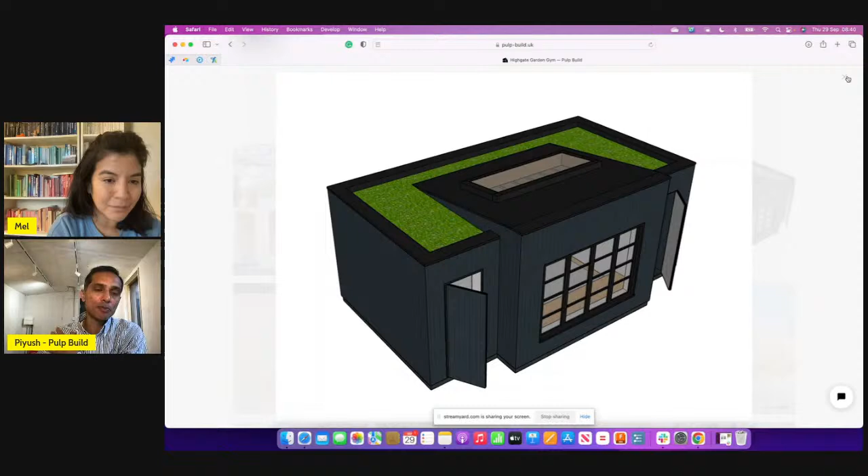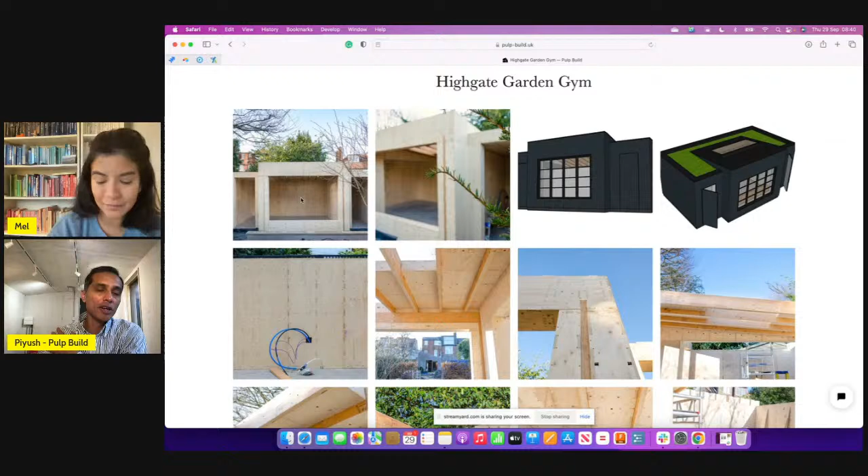This one is not a WikiHouse construction, but it is pretty much all digitally fabricated chassis, very similar to what WikiHouse components look like, with the Skylark system. It's slightly different because I believe Skylark was still in development during this process, so we used a bit of hybrid technology where the main components are all digitally fabricated out of 18mm, 3/4 inch plywood cut on a CNC router.

They cut like pieces of a jigsaw and come together as a block - so those are all the wall blocks you can see, and then we have roof blocks as well. The main load carrier in this situation is LVL, laminated veneer lumber - it's a bit like 2x10 timber, but it's engineered timber of the same size.

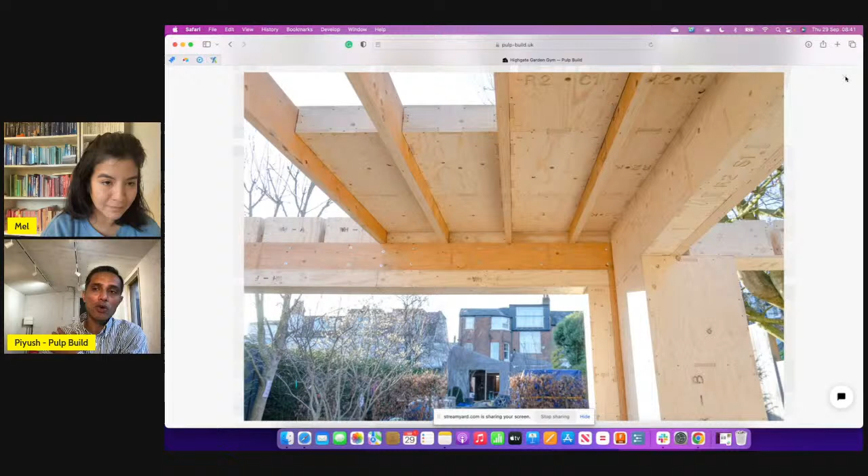So you can see we have LVL for the lintel, and then LVL as a post, and we also have roof rafters as LVL. Our cassette digitally fabricated system slots perfectly into the gaps - even the LVLs are placed and slot into prefabricated slots in the chassis. So there are no on-site measurements or cutting needed with this timber; they're pretty much pre-cut from the manufacturer and slot into place.

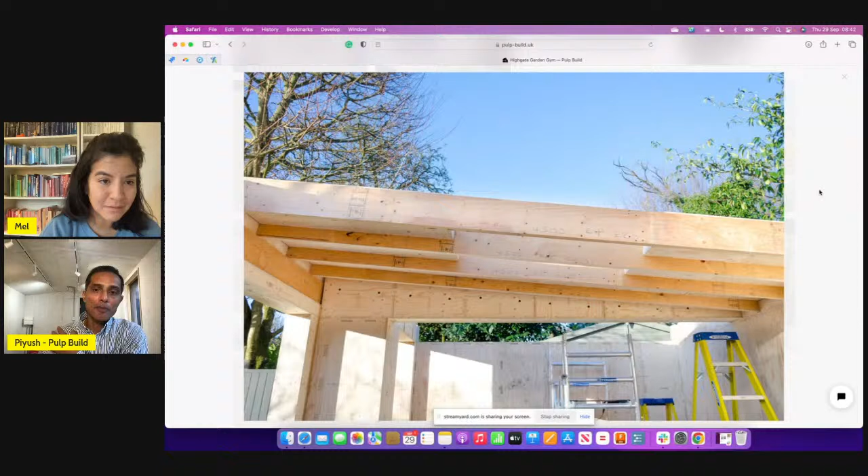So there you can see how we've got the mono roof and slope roof meet - so we can come up with any bespoke shapes and sizes.

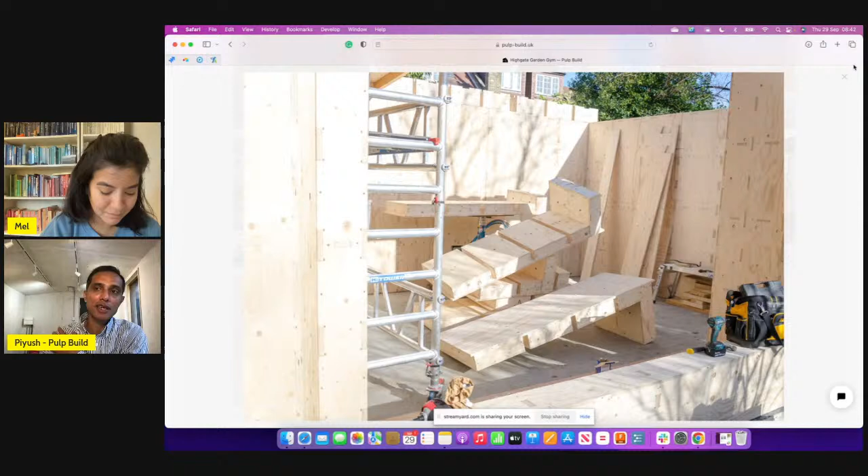So if I give you a quick example of the cassette system, you can see they are pre-notched to slots between the roof rafters, as well as the end box, which are quite different shapes and sizes just to meet different interior roof lines.

You can see here the system where we have a non-exposed roof line on the left and that exposed roof line on the right. So we can do quite architecturally pleasing construction with the similar system.

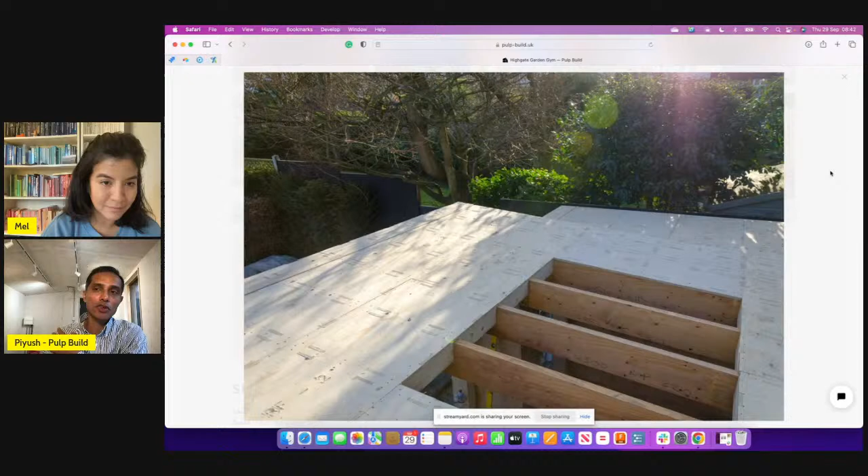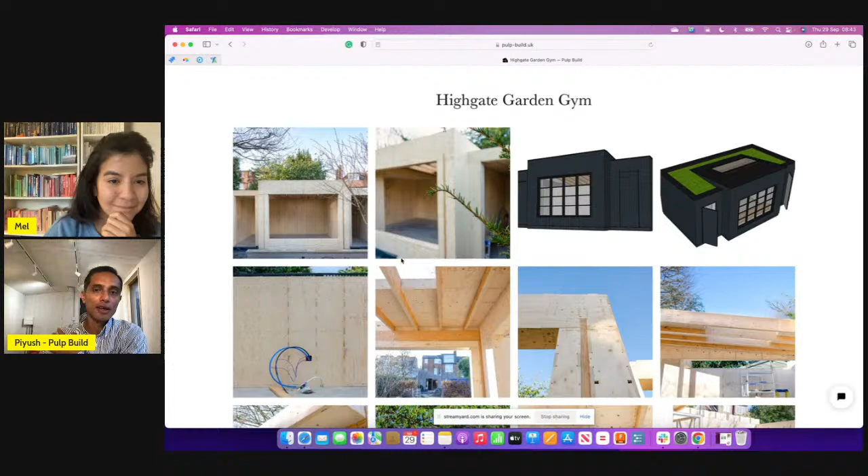This project we finished in about 5 days, a week's time from arriving material on site to weather wrap and handing it over to the main contractor, which then finishes the whole project. We haven't got final pictures yet, but I believe the project is finished with the architect.

The next project we did is our full turnkey project. This uses a combination of two WikiHouse structural technologies. Before I come to the final picture, let me quickly go down and walk through this fully bespoke system.

Normally in digital fabrication you tend to copy your one module many times, taking advantage of the WikiHouse or digitally fabricated system. However, the Garden Studio design, working with us as a digital manufacturer, the architect was quite keen for the shapes for the planning regulations, and there were some constraints. So we pretty much wrapped our digitally fabricated chassis around what planning permission was granted for the building.

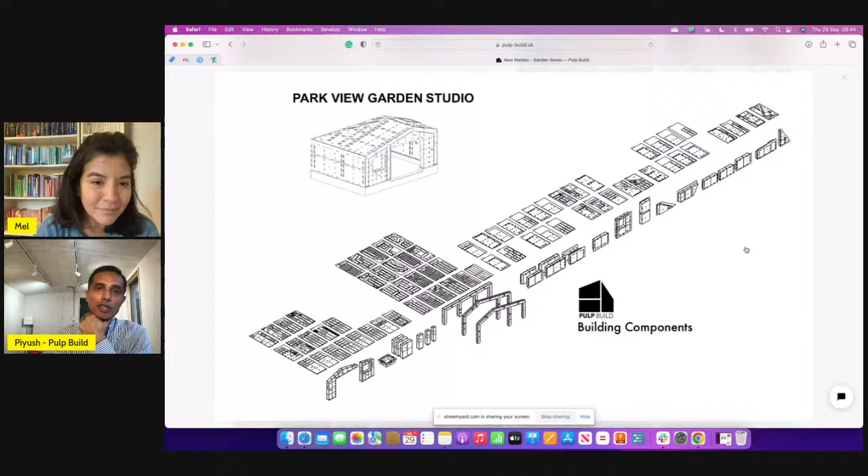Again, this is also a hybrid technology which uses some timber element to form a hip roof. So these are the three frames in place.

They are set on a concrete upstand, which is done by our groundworks contractor, and it's have to be very careful on the levels. But once it's all established and set, then we place these frames.

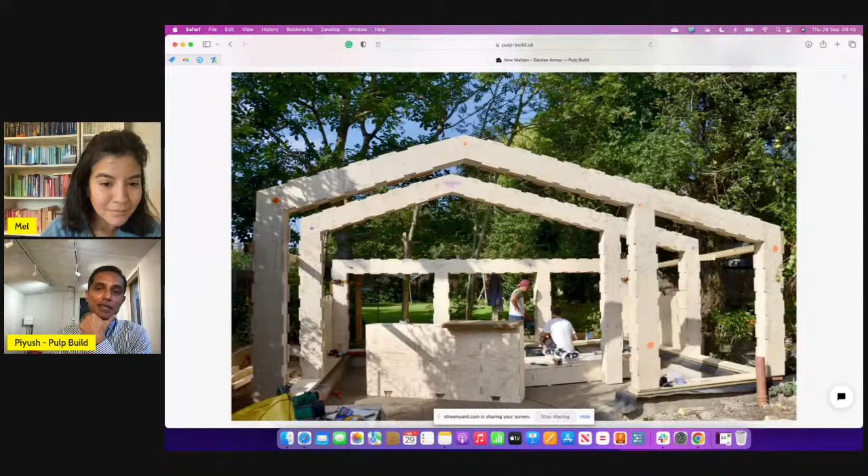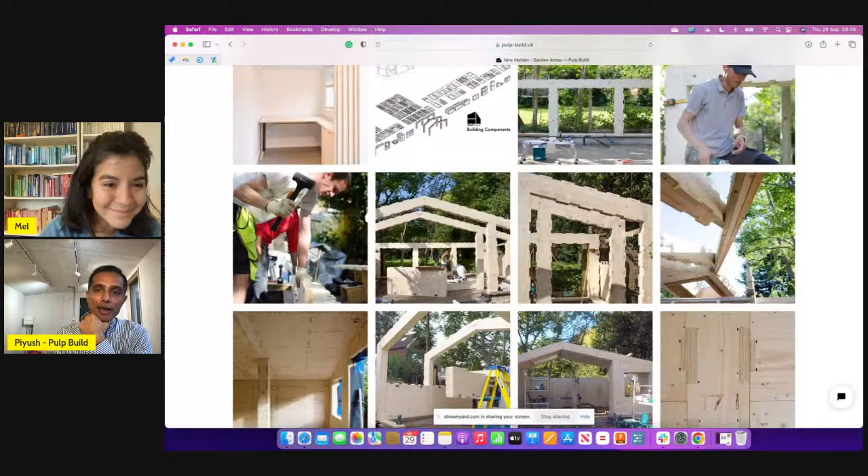There's a little bit of close-up of the beautiful WikiHouse frame structure. This is the back end of the hip roof, where you can see how the timber element is inserted into the prefabricated WikiHouse style frame.

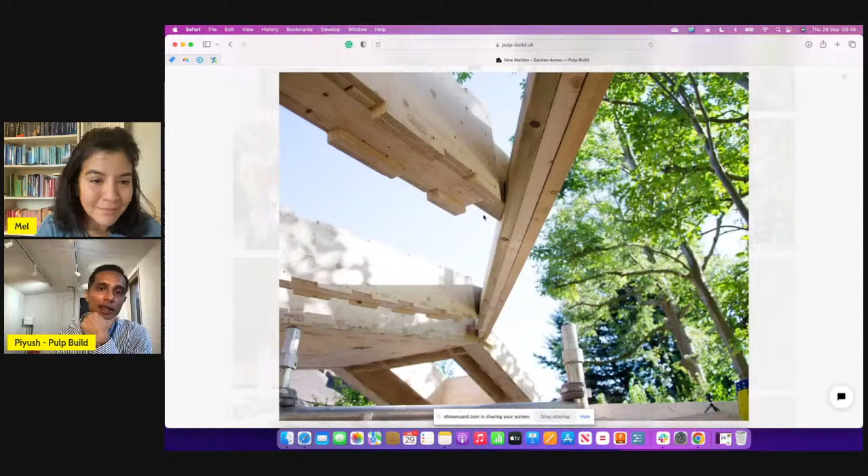Now these load-bearing roof rafters are digitally fabricated as well as using the timber technology. Just to give a top overview, that's how all the main timber frame is formed.

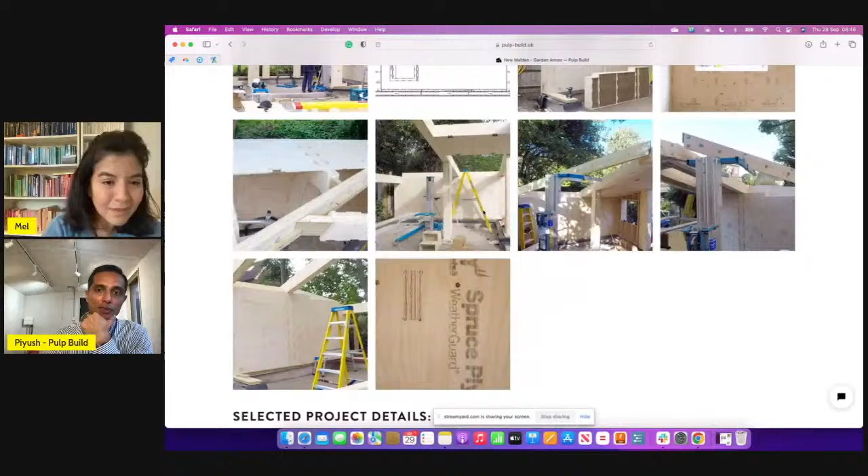Some more shots of how we erect them on site. We don't use any heavy lifting machinery. Most of the components are weighted quite carefully, so they can be handled by 2 people or a maximum of 3.

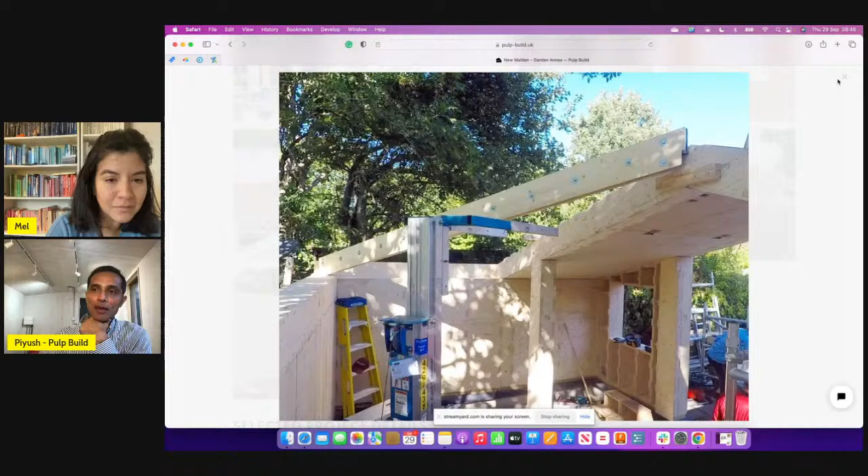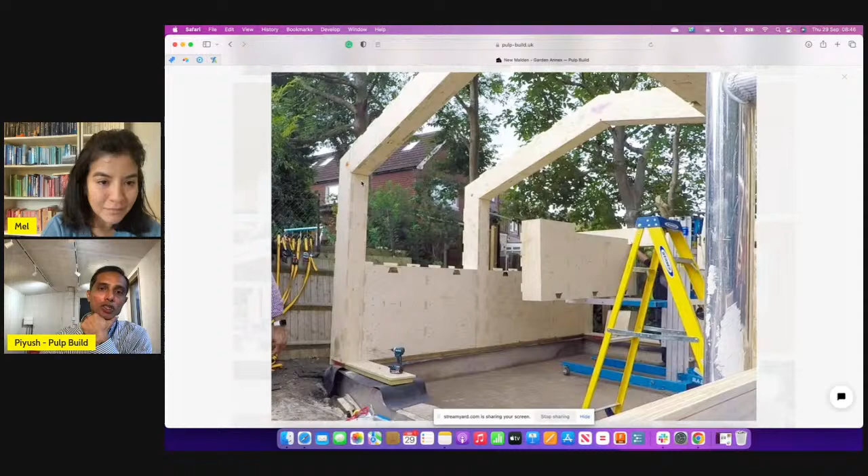And there's some of the cassette system that's part of the WikiHouse second iteration Blackbird system, which slots between the 2 portal frames. There you can see how once the building is closed up and weather wrapped.

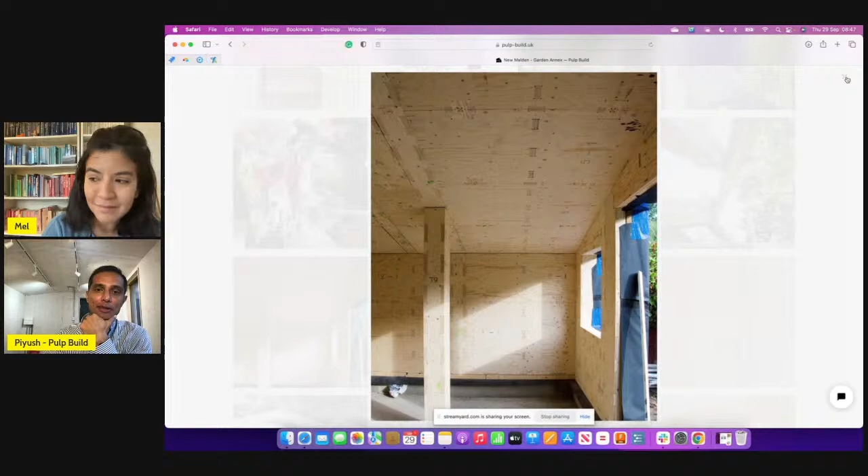Coming to this, we also finished the full interior. Now, one of the benefits of the WikiHouse system is that everything is model driven, so we don't have to keep measuring when we come to the internal furniture - we already have the model information and sizes.

So then we digitally manufacture all these interior furniture and fit out, which is quite simple, and then we can also place it in a model. This is a folding bed, so we can simulate the folding element and see how it will interact with the bifold door, and how the entry and exit happens for the resident when it's folded down.

There's a shot of how the Murphy bed then folds up.

And then we have used other contractors - we don't have all the in-house facility. So we do interior fit outs, but we have a plasterer, tilers who finish off the bathrooms, and exterior landscaping. We had a fantastic opportunity to work with a local contractor who has done this beautiful pergola and finished off all the landscaping.

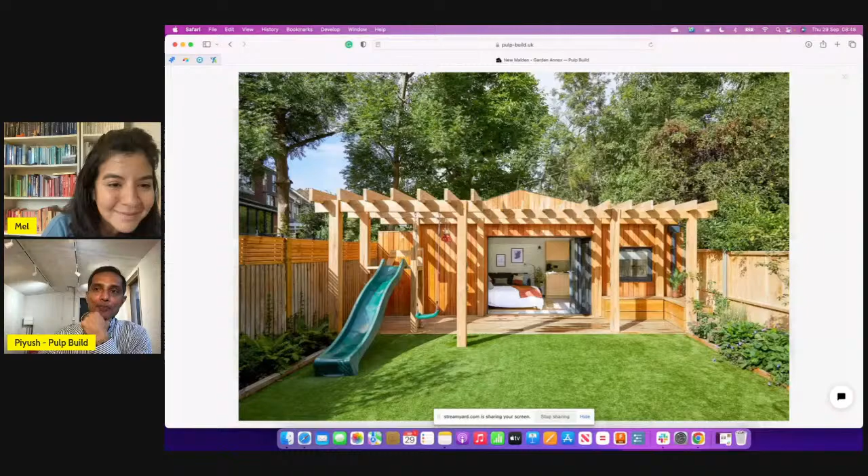There are other projects that we have done. Our Instagram has much more details. We talked about every single process, how we came about doing it, and the mistakes we made. If you want to learn all the mistakes we've made, that's all on the Instagram feed.

That's brilliant, I love the slide, I love the little slide on the left-hand side. Thank you. I'm just going to bring Clayton back in. Thanks so much for showing us that page.

As I said, I'll include the website and the Instagram URLs. I wanted to ask you a question because I'm quite new to the world of WikiHouse, and I've heard the word manufacturing a lot. I'm imagining you have a workshop, and we see the files on the screen, and then on the other end we see these beautiful creations of yours like you've just shown us. How does the process work? What is the manufacturing process like? Can you tell us a little bit about that?

One of the benefits of digital fabrication is you don't need a huge workshop setup. We can fairly start with a very small workshop. We have a 1,000 square foot workshop, which is not huge, but it's much more efficient when you schedule in your material and where the machinery is placed and your workflows. So we have a full size 8 by 4 foot, 1220 by 2440 CNC machine that processes standardized plywood sheets that you can buy from a local supplier or timber merchant.